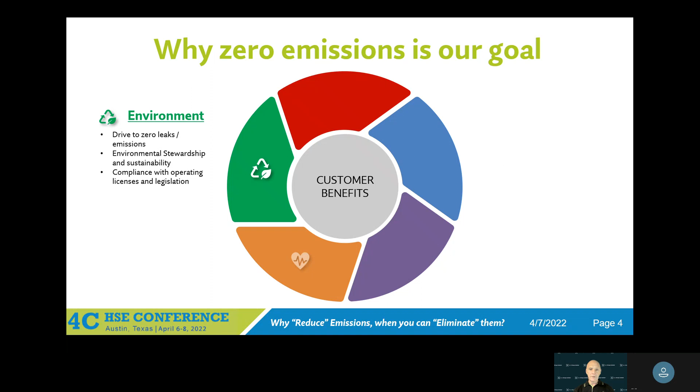In terms of our people, process and plant, we need to make sure that we're operating safely and we're protecting the health of all our employees. Now, the health of our employees is only the start of the equation, because if you look, for example, to the Far East and some of the air quality issues they have in some of the major cities over there as a result of, for example, burning coal to produce energy, you start to see that the wider population is also at risk from these industrial activities as well. So health and safety is not just about what happens on the plant, it's what happens outside the plant as well.

Of course, in terms of what we're doing in any operation, we're not going to be sustainable if we don't make profits. And it's really important that we focus on where the major impacts of emissions are taking us in terms of that invested capital delivering returns equation. So I'm pretty sure everyone in the room fully understands the difference between the cost of a valve repair, for example, versus the cost of downtime. One is a small number, one is a really big number.

The big number, of course, is associated with those unplanned outages that you're going to see when valves don't perform their intended functions. So we really need to have an eye on this. What is it that we can do in terms of that asset integrity management piece that allows us to make sure that we generate the profits that allow us to keep investing in our processes, our systems, our manufacturing, our energy production, and all the things we need to make society function as it does today.

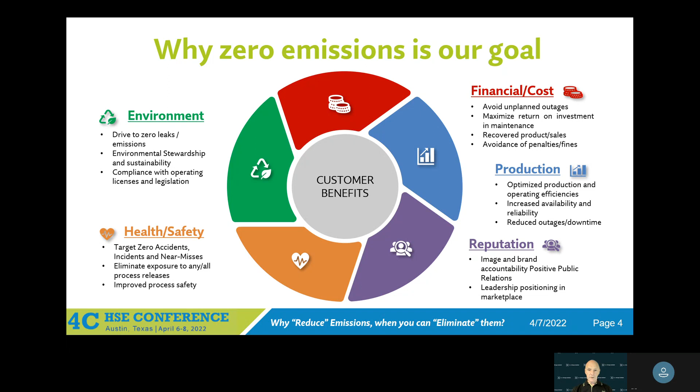So the more we can do at the front end to mitigate our exposure to those high risk moments in time, the better we're going to be in terms of sustainability. As I said at the start, whilst we're here to talk about the environment, we should really be taking a holistic approach, looking at all the impacts of everything we do and how each of those component parts fits together like a jigsaw, to make sure we do the right thing at the right time to make ourselves sustainable over the long-term.

There is no major organization in the world in the energy industry who are not now committing to grand plans, whether it's net zero or reduced emissions based on X year to X percentage of emissions reductions. Everyone's doing it. We have a champion in the UK in the CEO of BP.

You probably know Bernard Looney. You'll have seen him in the news, you'll have seen videos. He is really passionate about making sure that BP is correctly positioned for that long-term sustainable model. He's put in place some pretty exciting targets about what is required in the marketplace to make some of these things happen. And it's not just focused on what they do operationally, it's how their products are then used in the wider community, in the atmospheric scenario, where everyone involved in the equation reaches that same low carbon footprint.

So as I said, it's not just BP - we've got Shell, Total, ExxonMobil, Chevron, ConocoPhillips, Repsol, Petronas, Saudi Aramco. Everyone around the world is now acutely aware that they have to be moving down this pathway of renewable energy and reducing carbon footprints. So in terms of how we might look at that from an operational perspective, let's have a look at where BP are investing their cash.

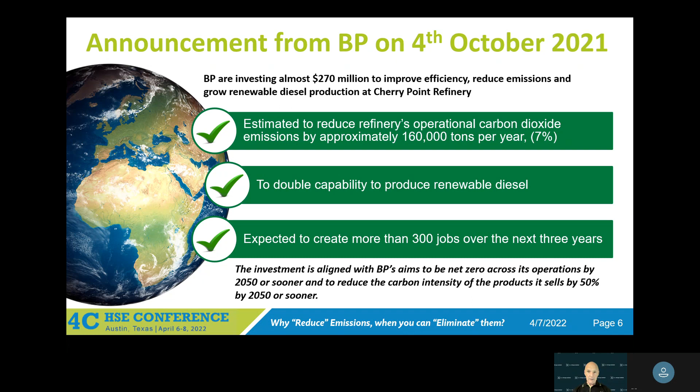Doubling the production capacity effectively means they're halving their production costs. So again, when we look at that sustainable profit margin model, it's going to be there for them for a long time to come if they deliver on this project they're currently investing in. And look at this last bullet point: 300 new jobs being created over the next 3 years. So yes, we're focused on the environment and emissions reduction, but there's a huge amount of spin-off benefits and other positive things that are going to happen when we get this model correct, and when we get everyone thinking like BP about where to invest sustainably in operations to take them forward.

In the USA, there is a huge industry in and around compliance issues in terms of emissions permission levels and all these things you're familiar with from the EPA, in terms of those consistent applied rules for verifying that mechanical assets are performing as they should be performing at specific time periods. That is well known. We see changes in appetite for this message depending on which party's in the White House.

But as I've said many times in the US market, it doesn't really matter who's in the White House. The general direction of travel is towards reduced emissions. So the sooner we get on this message and the sooner we start making these reductions happen, it's not really going to be of any significance who's in the White House at any one point in time.

So we have to accelerate our investment towards that lower emissions economy. It's a win-win situation. When we look at this as a whole, we can start to see where the benefits are going to come for everybody who's involved in that jigsaw puzzle that I mentioned previously.

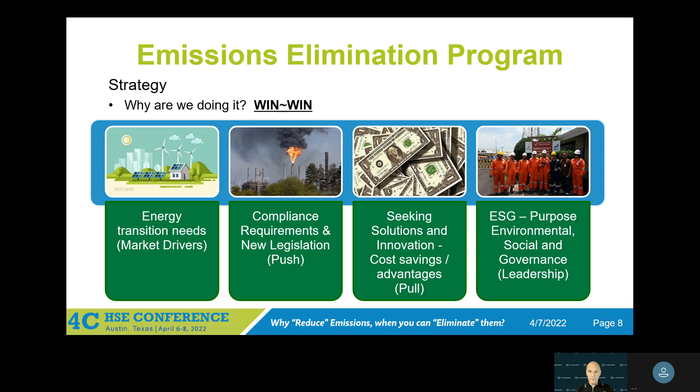So again, join all the dots back together, make sure we're doing the right thing at the right time, and the money will flow and the emissions will naturally be decreased over time.

So in terms of the hierarchy of emissions reduction, we can talk about 4 key areas. We can either reduce our consumption of energy. So that's the, I guess you could say, indirect cost of running your operations. That might be the power plants that are running to generate the electricity that turns the pumps and the motors that run your processes.

We can talk about replacement technologies. So instead of burning fossil fuels to create that electric, can we generate that electric from renewable sources such as solar or wind, or some subsea turbines looking at tidal currents, or wave machines on the surface of the sea. Lots of opportunities for us to replace that energy mix over time. It's not going to happen overnight, of course, but we need to be aware of it.

We can then start to talk about removing emissions from our operational activities. So removing those might be some sort of repair program that's in place. We can start talking about even removing gases from the atmosphere and looking at carbon capture and storage, for example.

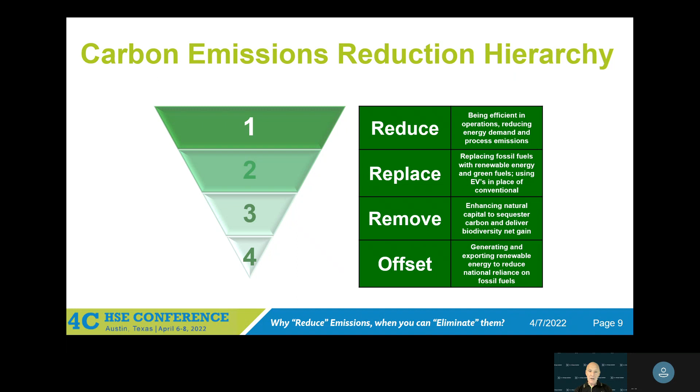When we drop down into the offsets, this is where we start getting into, can we offset one emission against another? Is that planting a tree? Is it planting some seagrass? There's lots of things to do in the mix. But what we really want to do is make the biggest possible impact in the shortest possible timescale. So we should be doing all of these things in tandem, in parallel. But of course, let's do the big things first that give us that immediate return on investment and the big advantage in the shortest possible timescale.

In terms of compliance, what we're seeing around the whole world, it's not just in the USA, where the EPA have renewed vigour in terms of the support they're getting from the White House currently. It's happening all over the world. Everyone is on the same message.

We in Scotland had COP26 over in Glasgow, which I attended, and there was some great ideas, some great energy, some great innovations. But we really need to roll that out now. We can't just have that as a talking shop. We need to run towards investing in these future sustainable, deliverable sustainable options that give us these advantages in the fastest possible timescale.

All of these white papers, all of these compliance standards around the world are all pointing in the same direction. What they're talking about is quantification of leaks so that we can take that top-down approach. Go after the big emitters first, and then we're in the laws of diminishing returns.

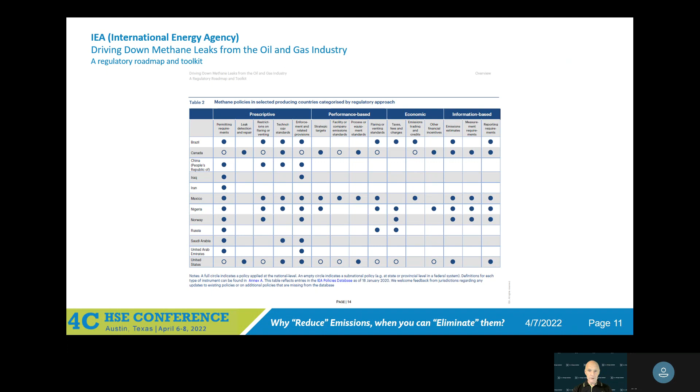So we're giving you a chance now to look at what arrangements you have in place, where you may have some gaps, and where you might want to take that forward to plug those gaps and get ahead of the demand curve. So we're not the only organisation helping companies reduce their carbon footprint, but what we are doing is

We're trying to take this holistic approach, this asset integrity management space, which is becoming more and more digital. Nothing written down on a piece of paper with a pen, everything using the ability to gather data electronically and transfer data, using algorithms for rapid analysis of survey work, whether it's handheld tools reporting digitally or permanently installed systems reporting digitally.

And collating all that information back together in an evidence database, where, as I say, it's going to start to generate some of these work orders that allow us to go and address the biggest emissions in the shortest possible timescale. So we have to take this connected approach.

We talk about intelligent valve management. We're a valve company. We started doing valve repairs before we got into all these digital tools and emissions monitoring and producing our own internal equipment and systems and manufacturing new innovative equipment. So we understand where the problems are, and we know exactly how to fix those problems.

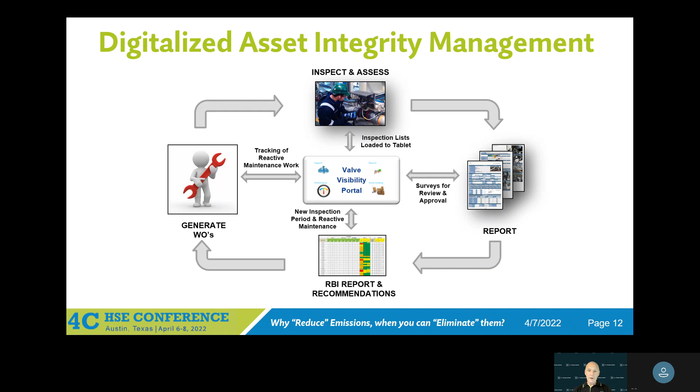So that's really the next step in what we're going to talk about. A 4-step approach to emissions elimination. The 4 steps are very simple. We need to go to source, and we need to use the correct tools to find the leaks. So that requires us to select the correct tools and actually go and do the survey work.

Once we have the data from the survey, we then need to analyze that data and say, what is it that we need to do next? What is the data telling us? Where are the big gains likely to be made? We can then start our mitigation process.

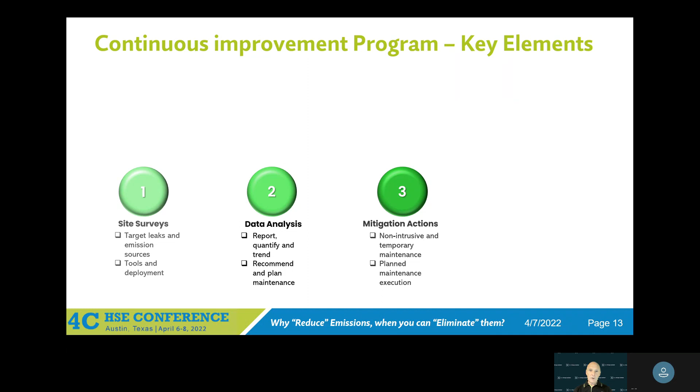So this looks like the temporary repairs. It looks like those in situ repairs, the quick and easy fixes that give us those rapid gains in emissions reduction. Of course, we don't want to stop there.

I said it's a 4-step process. The last bit of it, the closed loop element of what we're doing here, is to do a complete engineering review on recurring failure modes, for example. So if you start to see the same failure happening time after time, then clearly there is a design modification opportunity there, which allows us to engineer out that recurring failure mode.

So all of what we do is driven by our knowledge of failure modes, our expertise, and our pre-designed repair programs that remove all these emissions, again, in the shortest possible timescale.

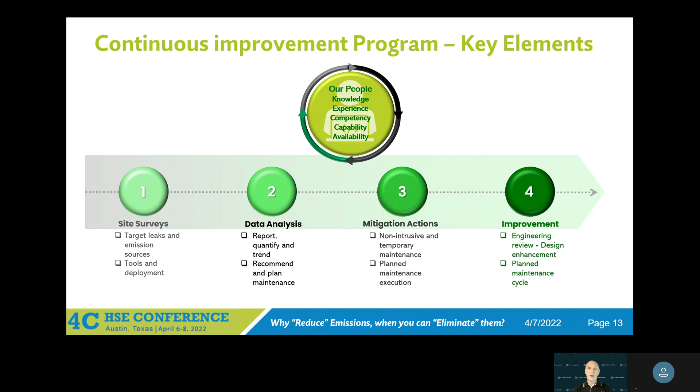So this is a continuous loop. It's driven by our knowledge, experience, competency, capability, and the availability of the correct tools being used by the properly trained personnel. Once we do that, we can rest assured that we're going to have the biggest possible reduction in emissions over time.

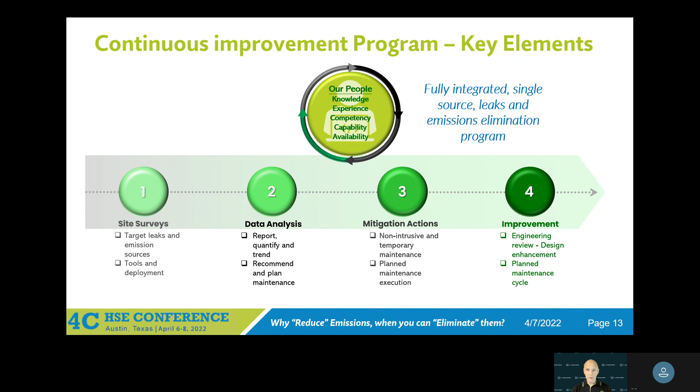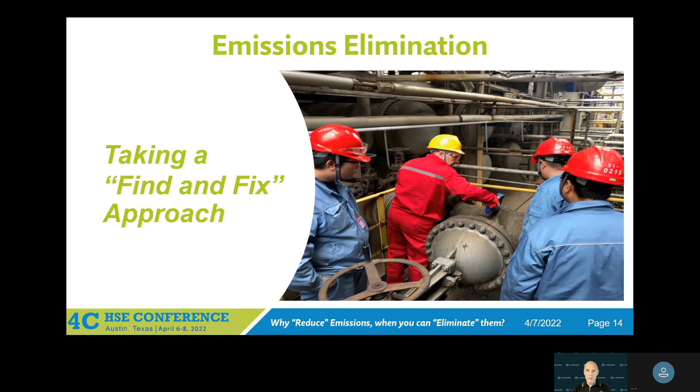So in the UK, 25% of all emissions are coming from industrial processes, and about 75% of those emissions are coming from flaring and venting exercises. So if we can go after these using our equipment and systems, then we'll have already gone a long way to achieving that net zero figure in a really short space of time.

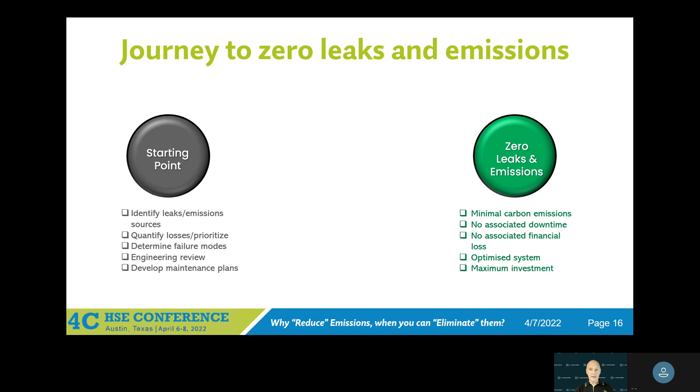So our start point, as I said before, let's go and find the leaks. Once we know where they are, we can move towards that model of zero leaks and emissions. It's a journey. We're not going to deliver all of this immediately, but we need to start running in that direction and take the necessary steps.

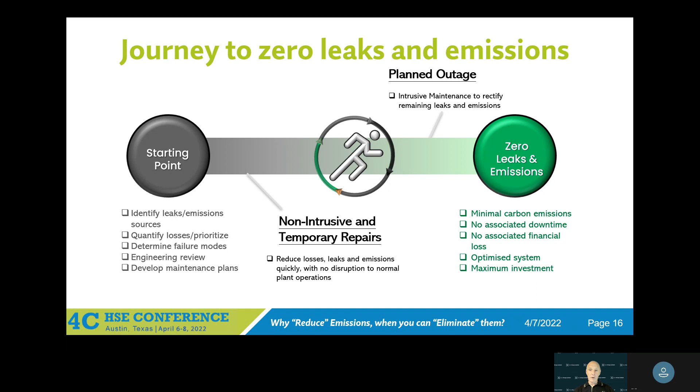We will start with the quick and easy fixes, the non-intrusive and temporary repairs, but we will end the process by doing those planned outages, by deploying the enhanced engineered solutions that makes these emissions go away, not just in the short term, but over the long term, the longest possible life cycle of the process plant.

We know that in terms of what we're looking for, the greenhouse gases are the ones that we really want to go after. Principally, carbon dioxide by volume is probably the #1 target. But if we go for maximum damage to the environment, then the #1 target really has to be methane, which is more than 80 times more damaging to our environment.

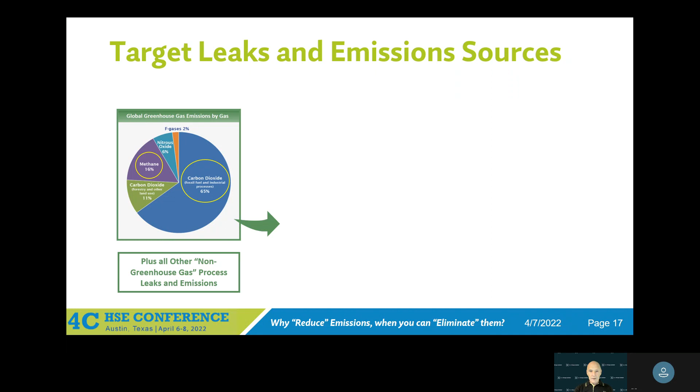Now, when we're going after these gas emissions, we have to understand that some of them are easy to find and easy to see. Others are a little bit more difficult. So we can look at the iceberg analogy here. Above the surface of the water, you can see everything that's going on, things that are happening underneath, which is perhaps maybe even the majority of emissions. They're not so obvious in terms of the sources.

So when we start selecting the equipment, what are the things we're looking at? Is it leaks to atmosphere? Is it losses to flare? I've already said the percentages where the big gains can happen.

Once we go subsurface, the things that are a little bit more hard to find, we start looking at vents and drains. We start thinking about those system inefficiencies. What is it that we're doing in terms of driving our process? If we've got, for example, losses on an airline, then our compressor's working a lot harder. It's consuming more electric, which means we're producing more CO2 to produce more electric to run that compressor harder.

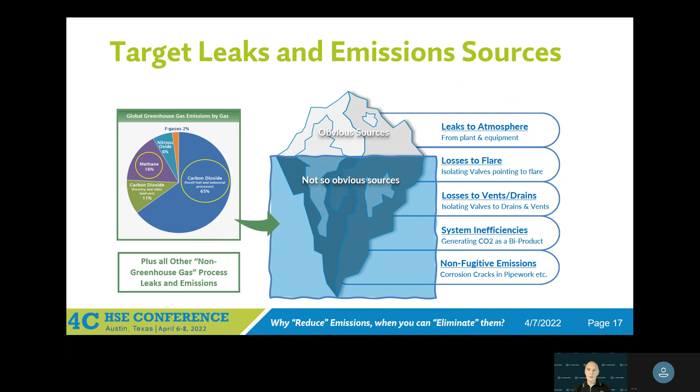So you can see there's dominoes that are falling throughout this whole process as we operate on a normal basis on our operating plants. Things that are hidden, for example, we might see corrosion underneath insulation. How do we find that? How do we mitigate against those leaks happening? We need the right tools and equipment to go and find them.

So in terms of our process plant, we can start looking at the selection of equipment. Leaks to atmosphere, optical gas imaging. We can use those sniffer devices. Anything that's going to give us an advantage in terms of quantification also gives us an advantage in terms of prioritization of our repair work orders.

Losses to flare. Again, our handheld tool, Midas Meter, looks at acoustic emissions through seat leakage. That's valves that are not holding back the process fluid gas and letting it go to flare, and it's then being burned off in the atmosphere.

Lots of opportunities there. System inefficiencies, we've talked about that extra energy required to run the process, but it could be actually connected with the process itself. Maybe just the process isn't working correctly or to the maximum quality standard or efficiency level.

So thermal imaging, ultrasonics, we've got Midas sensor permanently installed options in the V-MAP, as you heard in the introduction, some of our own products, and other complementary condition monitoring tooling. You just have to walk around the exhibition here this week and you'll see literally hundreds of different tools that can be deployed at any one point in time.

Pinpointing those against the failure modes is the key to success. When you join it all back together into a single program, that's when you make the maximum gains in the shortest time scale. The losses to vents and drains and the non-fugitive emissions, again, different types of technology to still go and make sure we're getting the earliest possible indication that these leaks are happening.

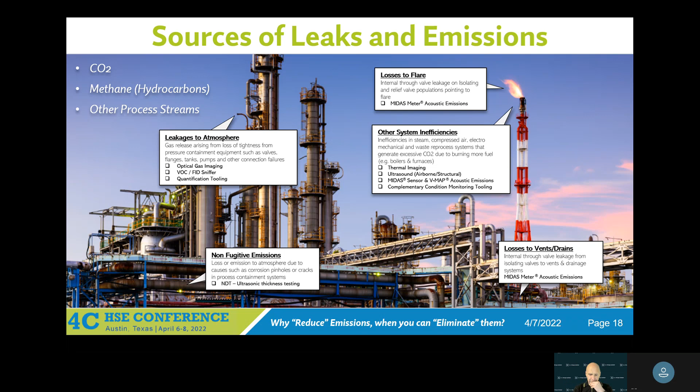So we've given a quick overview of where some of these tools could be used. Visual inspections, using those tablet devices to run through a checklist, that's a human intervention. You know, most plant managers will tell you there's nothing more valuable than walking through the plant and just using your eyes to have a look and see what's going on.

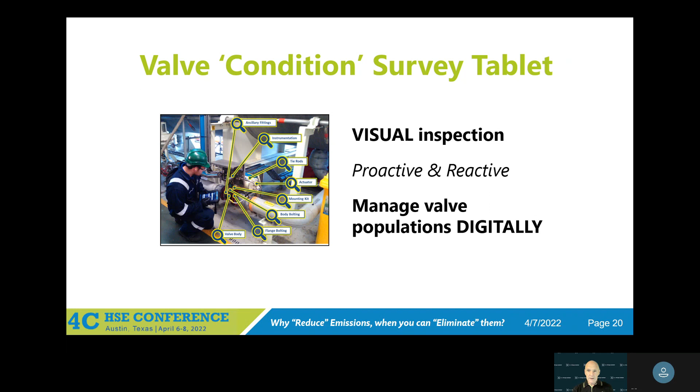So this visual inspection, 40 odd points, we can capture that information in a database that someone else might want to review and interrogate later on.

Through seat leakage, those flares, vents and drains, importantly, quantifying it, not just understanding that it exists, but which are the valves that are causing the biggest problem. If we go and fix them first, then we'll make the maximum impact in the shortest possible timescale.

We can also, once we start putting a time and date stamp next to every survey, look at how that leak rate is changing over time.

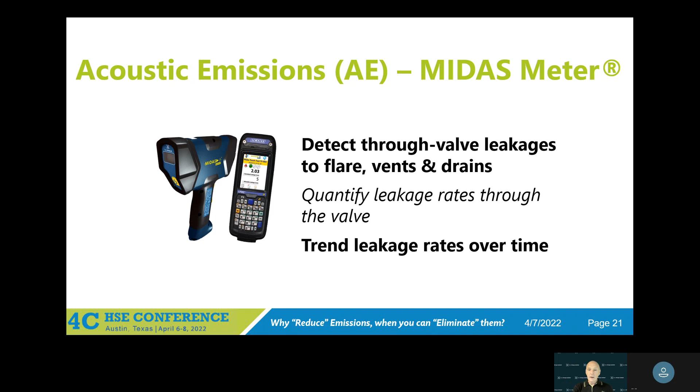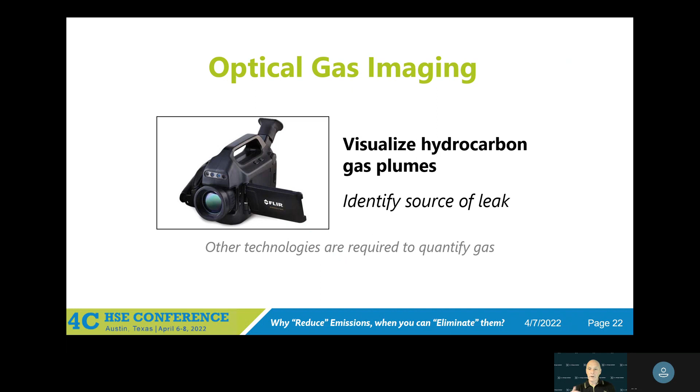Optical gas imaging, again, a really good way of surveying a wide area in a short space of time. Just by scanning across from a distance, you can look at multiple valves or multiple potential leak paths in a wide area basis. So it speeds up that process, which will then allow you to localize in using other tools to start getting involved in quantification, because what that won't do is quantify the gas that's escaping through the leak path. Some really sensitive tools are available.

When we start to talk about the gas analyzer devices, we can start from literally 0 ppm. And this is way beyond anything that you would get with optical gas imaging. When you start dropping to those ppms, and again, the EPA standards that we've spoken about, the compliance requirements, they all have very clear, specific numbers that must be adhered to in terms of compliance.

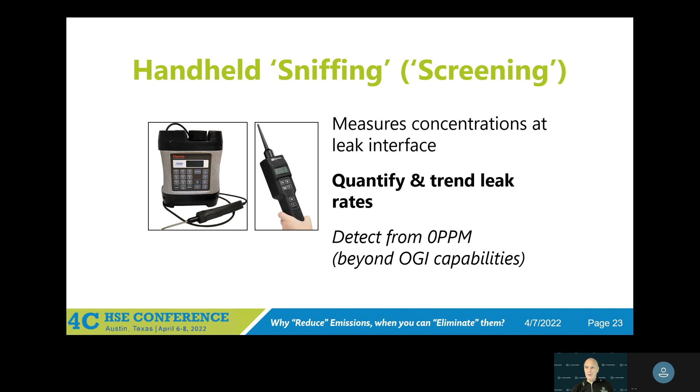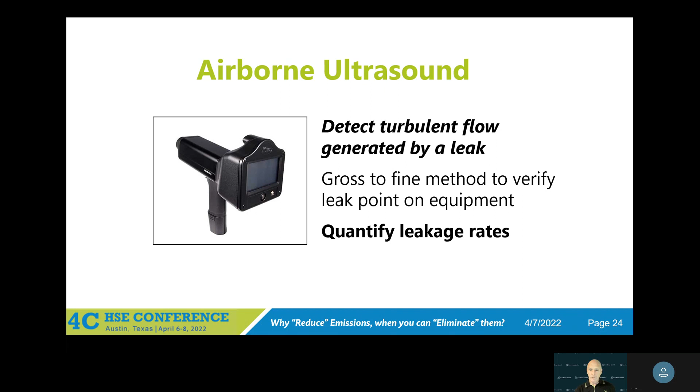And so you do need all of the tools. You can't just use one tool and expect to have all of the results that you need for those compliance purposes. Airborne ultrasound, again, useful for sweeping larger areas and then homing in on where the source of that leak is. Some of these tools will do quantification, and if you've got a choice between the ones that will and won't, I always recommend go for the ones that will help you quantify those leakage rates.

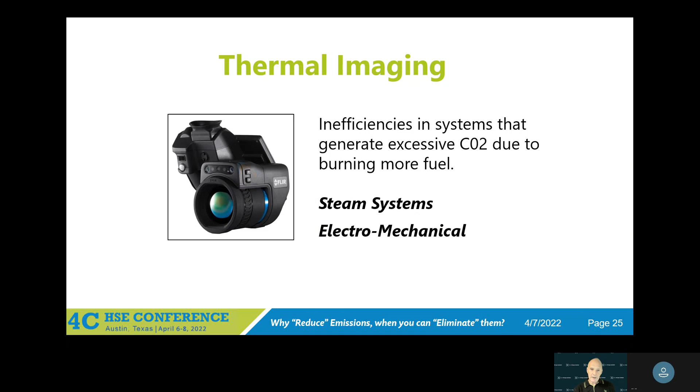CO2 again is a big target for these thermal imaging cameras, and steam losses in systems are really easy to spot when you use the right tools in the right place.

Of course, what I've described to you is really just touching the surface and scratching the surface of all the tools that are available. But what I find when I start having this conversation with customers is that they get confused about which tools to use at which point in time.

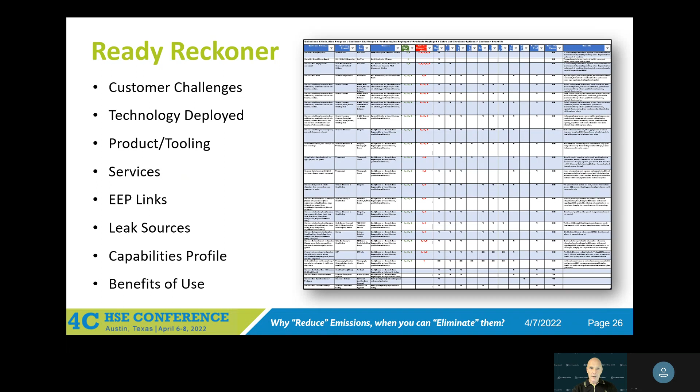So we've created this Ready Reckoner to help guide our customers through what it is that you're looking for, what are the sources, what type of technology will find the source of those emissions, and then which part of that 4-step program we need to deploy at this point in time to help you on that journey towards zero emissions. So a lot of guidance is available from organisations like ourselves who have joined all the dots back together for you.

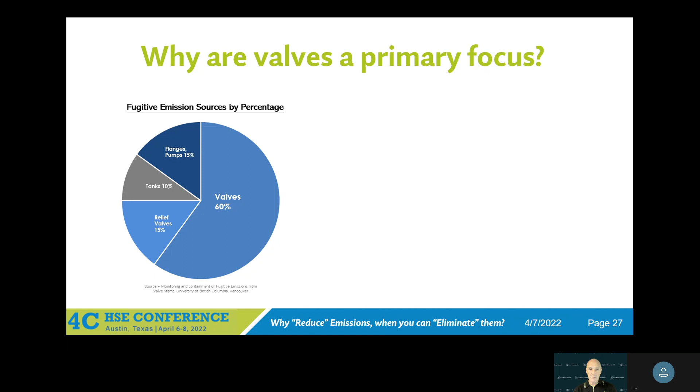Valves are, as I said, our core, our primary start point, because we started off as a valve repair company. This is a study that's very often widely rolled out, from the British Columbia University in Vancouver, which said that most of the problems, 75% or more, are coming from valves on the process plant. So if we fully understand the valves and where the leak paths are, then we can start to think carefully about exactly which technologies we need to use.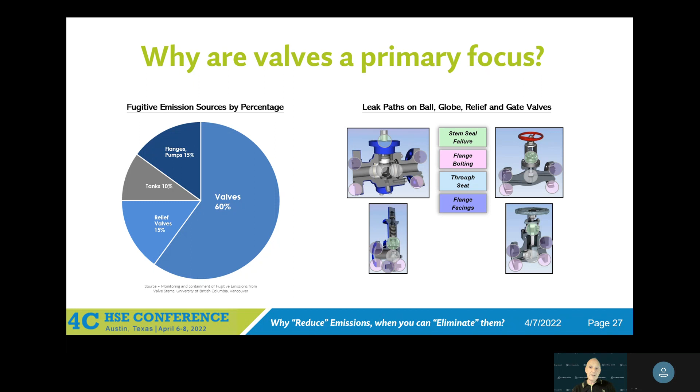Is the primary leak path coming through the stem seals? Is it coming from flange bolting? Do we have through-seat leakage, which is not escaping to atmosphere but might be finding its way to a flare? Are the flange facings damaged? Have the body to bonnet and trunnion bolting been damaged in some way the last time someone took it out? Is the RTJ ring damaged? Has the raised face become corroded?

And then we can look at plugs and vents and all the fittings and other accessories that are attached to the valves. The sealant injection points - have they become corroded? Do we have a damaged check valve in that one-way sealant injection port? When you start to look at it, there are so many potential leak paths that you couldn't possibly just use one tool to find everything.

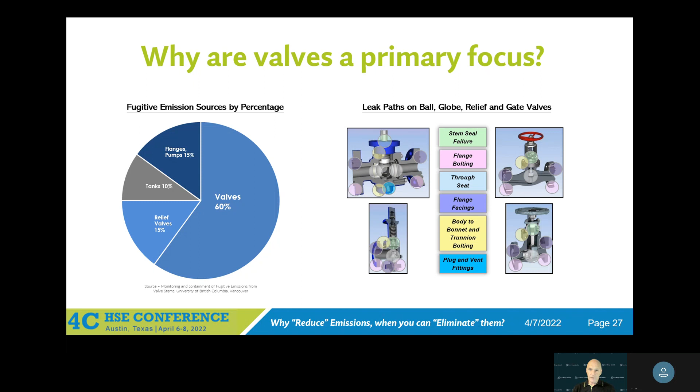So I keep coming back to this jigsaw puzzle, and it's a join-the-dots exercise. Make sure we're using everything as much as possible.

Now, one of the great things about working with a valve specialist company is the fix-it element of what I've been describing as our key 4 steps. Non-intrusive in-situ repairs, where we're using clamping devices, or we're doing that in-situ repair that minimises your downtime, bearing in mind that's where most of your costs are going to come from when you do have a problem. Minimising that downtime is of massive importance.

So anything we can do to give you a temporary repair to get you through to your next planned shutdown is going to have a massive impact on your accounts at the end of the financial year in the final analysis. Of course, we do also want to support you during the planned outage operations.

And so there's a whole other rake of things that we can do, not just about replacing valves or accessories in and around valves, but looking at how existing valves can be repaired. So what is the break-off point, the balance, the break-even between putting a new valve in there that had a massive carbon footprint to produce, versus doing a repair to some of the components, which does have a marginal cost, but is much lower in terms of its carbon footprint.

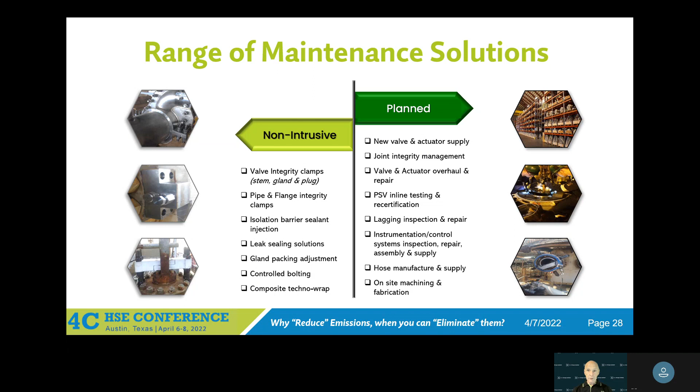So again, we have to think about this wide open approach and have all of the solutions at the table, ready to be deployed at the appropriate timescale so that we get to that zero emissions model.

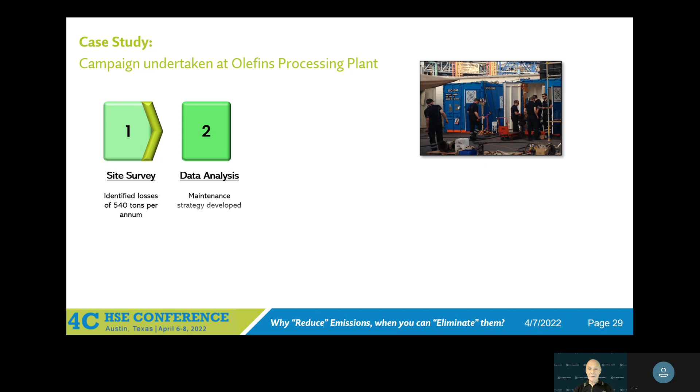Looking at this in a real case study, this is a survey we started off with on an olefins processing plant. We took that 4-step process. We started off with a survey - 540 tonnes per annum of emissions were detected. We analysed that data and asked what we can do in the first instance to start reducing that carbon footprint. That allowed us to do our non-intrusive maintenance activities that I described.

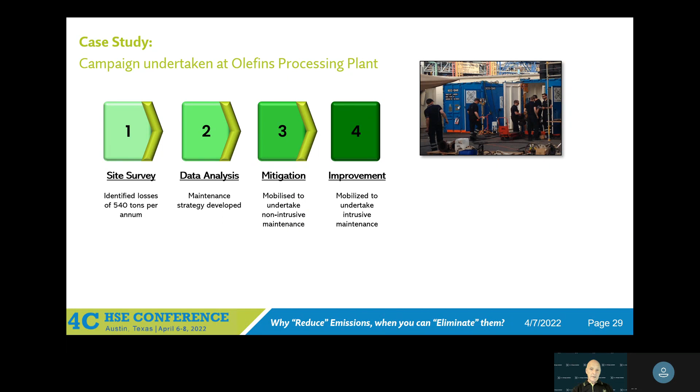And then, because we put all our resources on the plant and stuck around until such time as we could do a full-blown supported turnaround activity, we looked at that intrusive maintenance model. So here's what we did: we repaired 178 online leaks.

We had 8 isolation valves, which were injected with isolation barrier solutions, because those injected fluids have a massive benefit for you. 700 valve overhauls, 1,086 flange joints reassembled with new gaskets, flange faces remachined 221, and 142 new valves supplied.

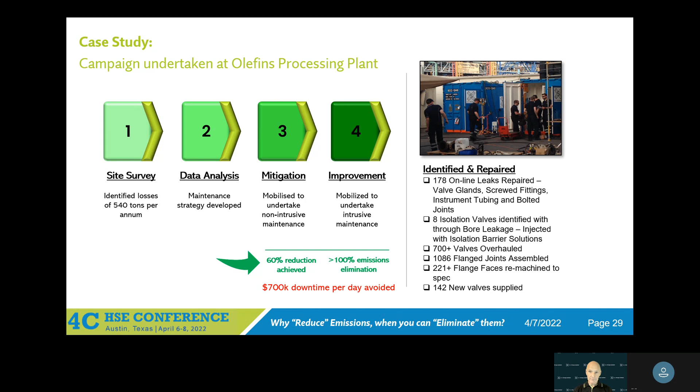The most important thing is, while we did the mitigation exercise, we saved the customer $700,000 per day in downtime. So even that step 3, where we made that 60% improvement, that's just in reductions. We also saved them $700,000 per day. So big numbers, they add up really fast.

Key elements of the most complete emissions elimination programs. It's ideal if you've got a single...

Yes? We've got 5 minutes left till the next presentation. So if you'd like to begin your wrap up, that would be great. Thank you. Perfect. Thank you.

So ideally, we'll have a single source provider that joins all that data back together, because what you don't want to do is have multiple vendors with fragmented data sets. It's not going to give you the outcome that you require. You also want to be working with a subcontractor that does that find it, fix it, and continuously improve closed loop activity.

We need to drive all our investigation work by criticalities. What's the probability of failure? What's the consequence of failure? That risk management piece driven by risk-based inspection.

Taking the top-down approach requires quantification. So if your tooling is not giving you the cue, then you've got a problem. Bespoke engineering solutions will get you to the end point much faster than you otherwise would get there.

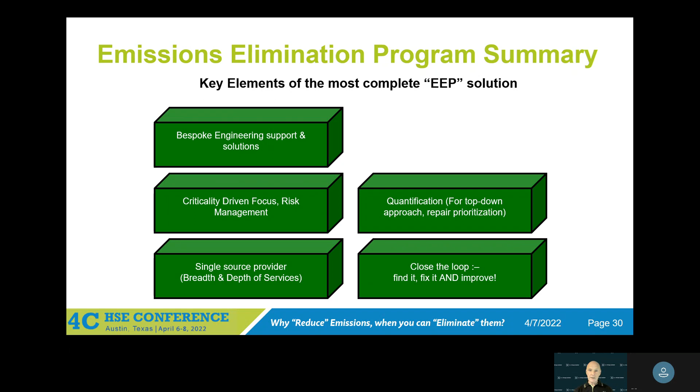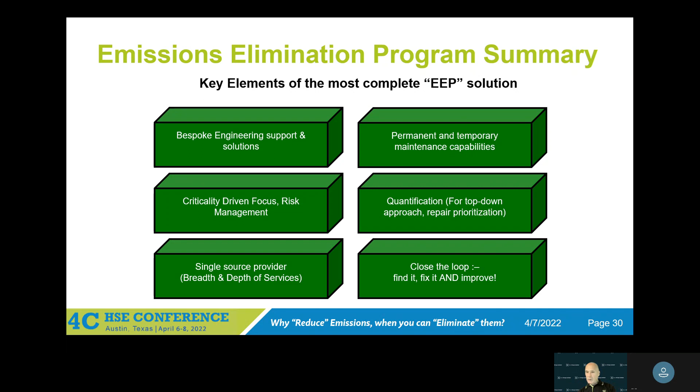Rely on an experienced contractor is the key message. And get on with doing those permanent and temporary maintenance repairs that move the needle from where it's currently at. Even if you can go and take that first 60% step, it's a massive improvement on where you're at.

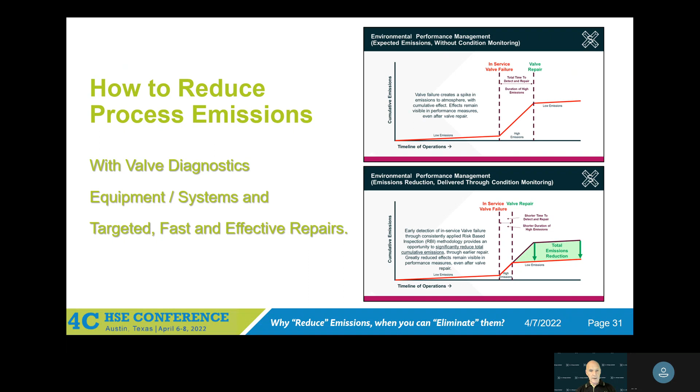I've said it many times, but I can't stress it enough. Use the right tools. Fastest route to net zero. I've already given away the game here. We know what you need. You need to be able to find the problem, quantify the problem, and then predict where that problem's going. So our focus is to find the leaks for you, give you the quantification, and do the trending.

So LDAR is dead is something I said about 3 years ago, and people laughed. LDAR is dead because LDQAR is the future. We need that quantification piece to drive maximum change in minimum timescales. So if you're not doing quantification, it's going to take you longer to get there. So let's stop talking about LDAR. Let's get the whole community talking about LDQAR, and let's deliver those benefits as soon as we can.

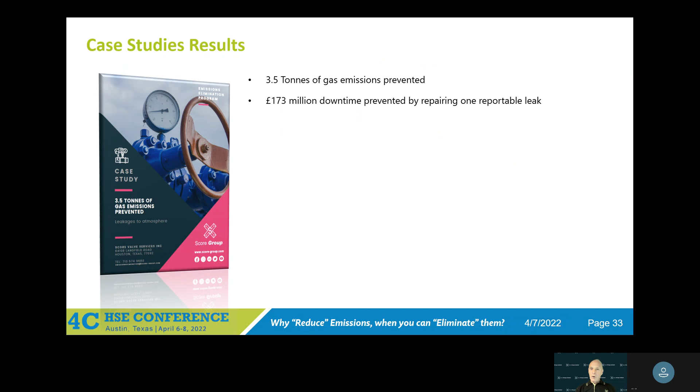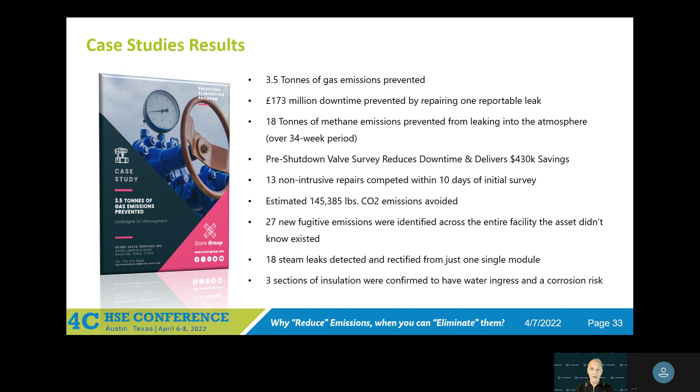If anyone's interested in any case studies, what we've done for customers in terms of either repair methodologies or specific examples where we've been able to reduce emissions or save money or improve safety performance, again, we can share all these with you. I'm going to give you some contact details at the end here that you can get in touch with me either through LinkedIn or on our websites or through our EEP email address. There is a flyer. Again, I'm happy to email that out to anyone.

But let's get on with doing the correct surveys with the correct tools so that we can do prioritized repair activities and continuously improve our processes over time. Once we do that, we will have no problem whatsoever in reaching net zero well in advance of 2050.

So with that, I will thank you for your time. There is the email address that you can communicate directly with us, or as I say, you can find me, David Anderson, on LinkedIn, and I'll be happy to answer any questions on those channels, or indeed, if there's anyone in the room that has a question for me today, I will try my best to give you an answer.

Hopefully I've met my timescale there. And thanks for your attention. Hope you enjoy the rest of the conference.